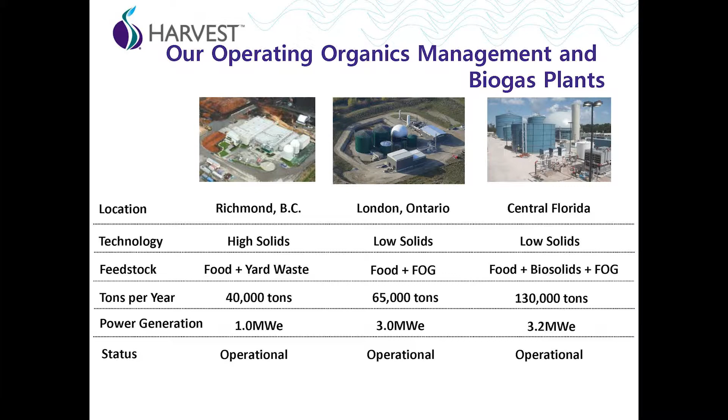And the facility in Central Florida, we're co-located with Reedy Creek Improvement District, and that is basically the municipality for Walt Disney World. They're in charge of all the infrastructure, water, sewer, roads, irrigation, energy for Walt Disney. So it's a unique municipality, and it's a unique partnership we have with this entity. So at our facility, we bring in food, biosolids from the Reedy Creek wastewater treatment plant, and fats, oils, and greases from area grease traps.

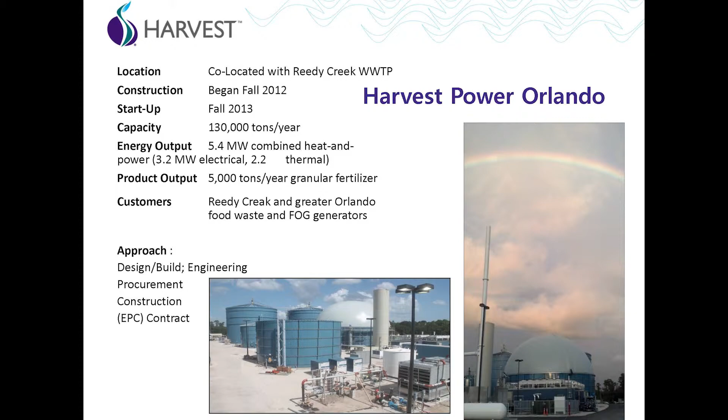And we have a process called anaerobic digestion that breaks down the organics, and the result of that is a biogas that's very rich in methane that we use in engines to produce electricity. And as a byproduct of the organics breaking down, we have a fertilizer product, which is used locally. So our facility is relatively new. Construction began in fall 2012, and startup and commissioning in the facility was a year later in 2013. So we've been up and running for approximately a year and a half.

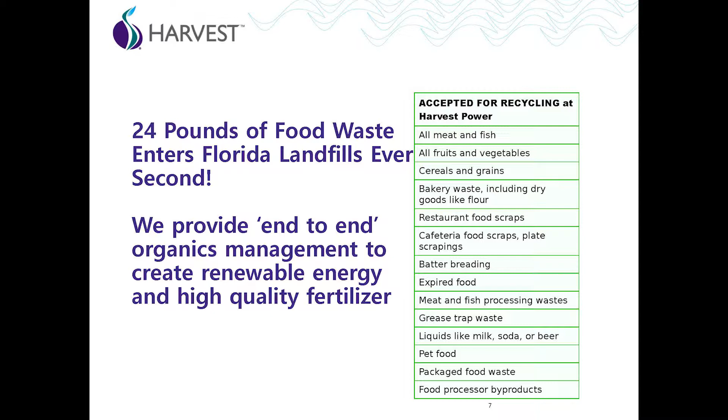So just some statistics. Every second, there's approximately 24 pounds of food waste that enters area landfills. So we're looking to bring material, organics, divert from landfills and bring to our facility. And we accept meat, fish, cereals, food scraps from the back of the kitchen, expired foods, damaged foods, pet food, liquid, oil and grease material. There's a lot we can take in and very few things we can't process.

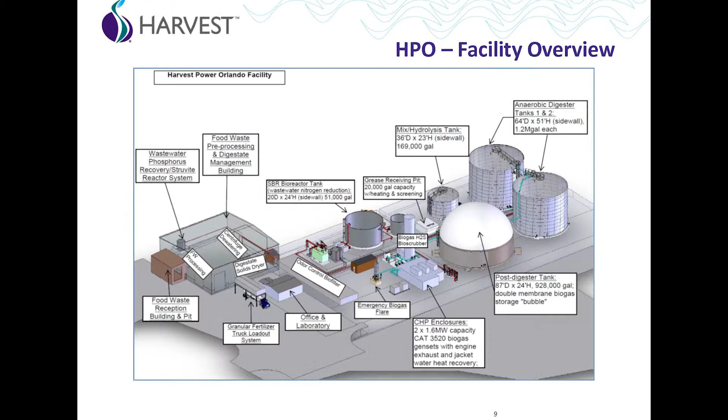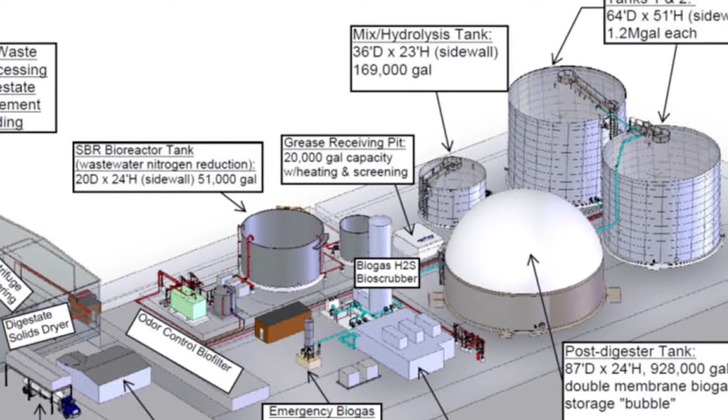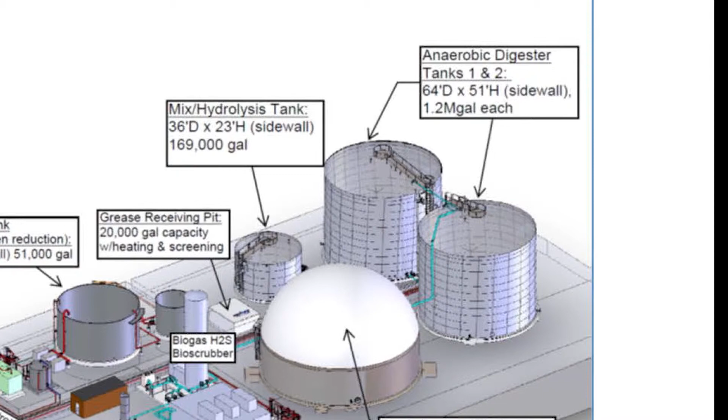So here's a schematic overview of the facility. So this area here is where we bring in food waste, and we have a food waste processing system in this building which removes papers, plastics, metals from the organics waste stream, and that material is then pumped as a slurry over to this tank here, which is a mixed tank, and this tank mixes the food waste organics, as well as liquid grease waste from grease traps, and biosolids, sludge from the wastewater treatment plant, which sits up here. From the mixed tank, the material moves to these 2 tanks, anaerobic digesters, which are heated and mixed, and the organic material breaks down in these tanks.

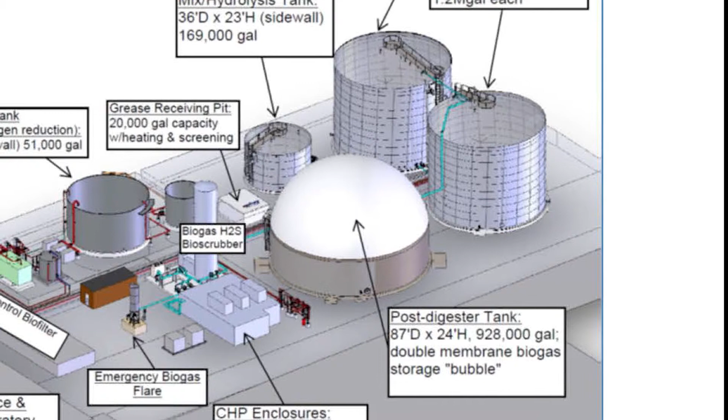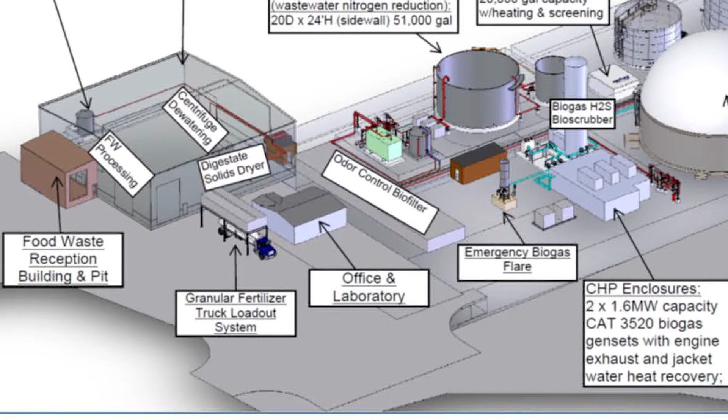And as the material breaks down, it releases a gas we call biogas, which is stored here. And from this bubble, the biogas is used in two engines, 1.6 megawatt Caterpillar engines to produce renewable electricity. So we use a portion of the electricity, about 20% on site, to power all of our equipment, and the rest goes back to the utility and goes on their grid system.

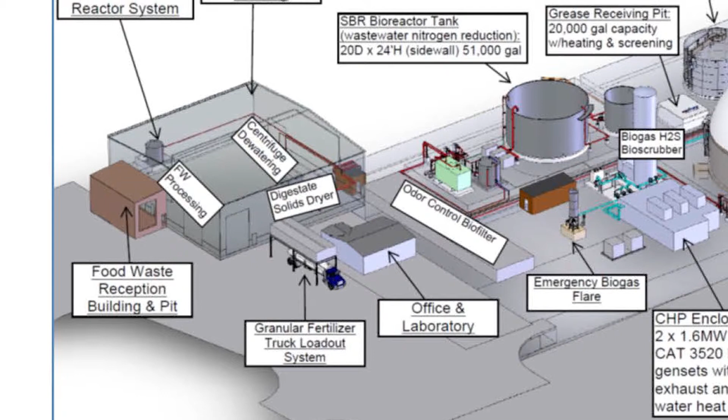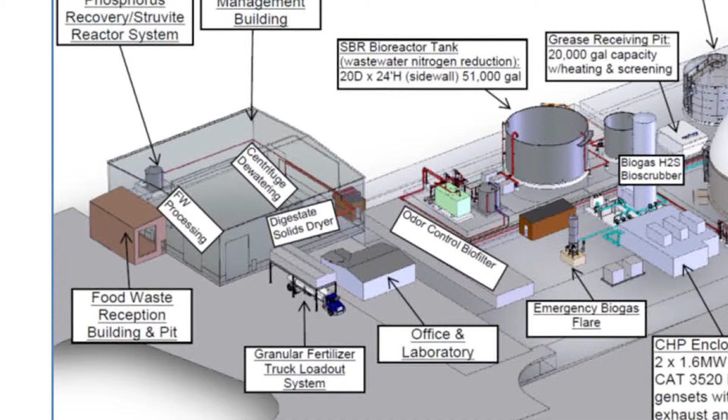So after the material breaks down in these tanks, it's stored here, and then it's pumped back over to this building where the water is taken out of the material, and that produces a cake-like material that is then dried. So the cake material, the digested organics are dried to create a fertilizer, which is stored in a load-out bin here, and then trucks come back in, and the fertilizer dumps into the bed of the truck, and it's hauled away to local agriculture, citrus and sod farms mostly.

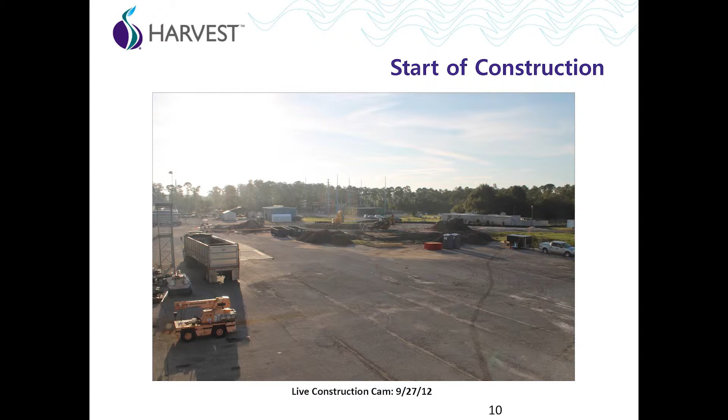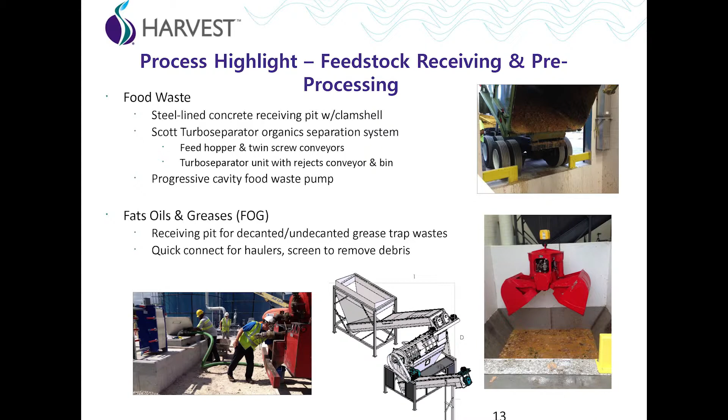So here's a photo of the facility at the start of construction, and then a little over a year later, the end of construction. So just a little bit about our equipment. The food waste comes in on trucks, you can see here, and the food waste is dumped into a pit, and we have a clamshell crane type system to move the food waste into our food processing system, and this removes the inorganics, the papers, the plastics, the debris from the food waste, and water is added to this machine to create a food waste slurry, which is then pumped to the mixed tank and the digester.

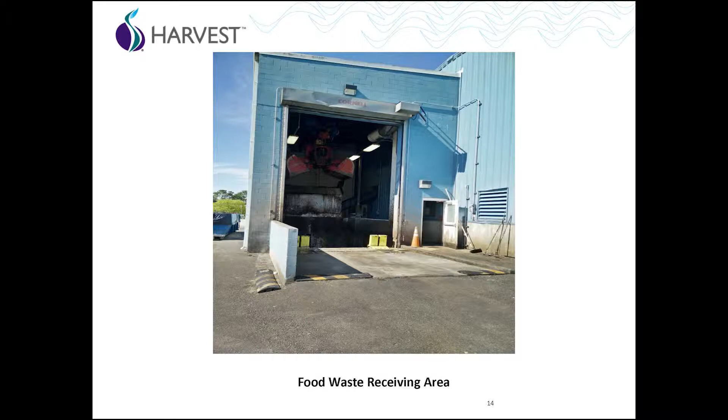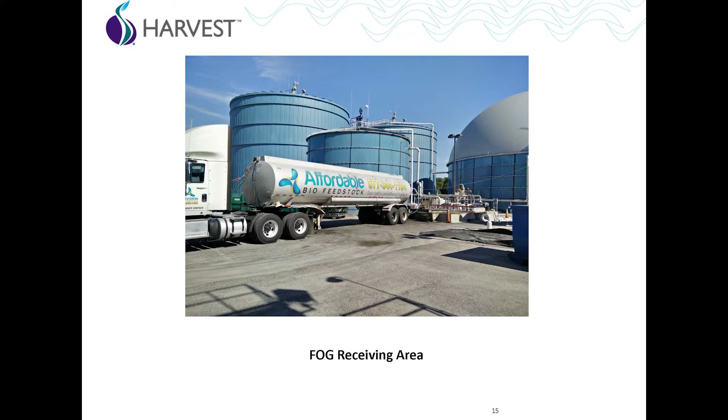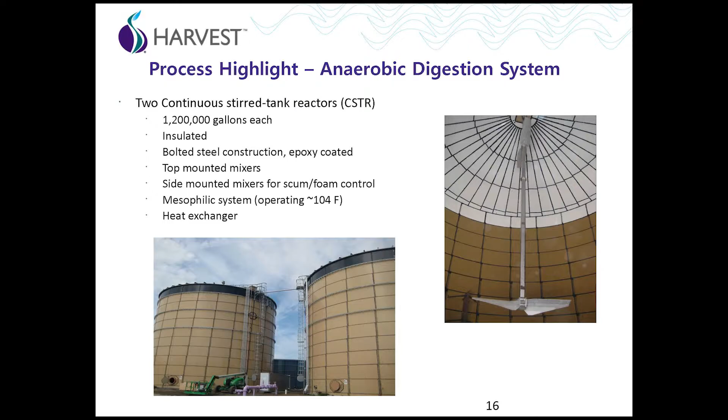So here's just a photo of our grease receiving station, which is basically a 20,000 gallon concrete pit that the truck haulers back up and, using a hose, unload the liquid grease into. So just a photo of our food waste receiving area. Our FOG receiving area with a tanker truck of material. This is a look at the anaerobic digestion tanks. Each tank is 1.2 million gallon, and they're bolted steel construction. They're heated and mixed. Here's the mixer that hangs down into the tank, and this is where the organics are broken down to produce the biogas.

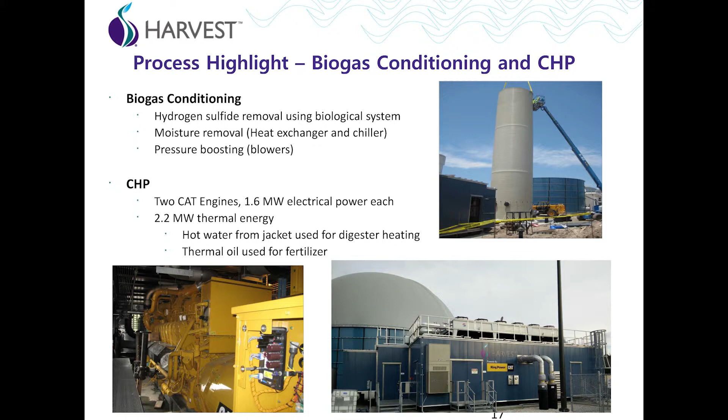So the biogas is treated. Before you can burn it in engines, you have to remove moisture and hydrogen sulfide. So this is the tower for scrubbing out hydrogen sulfide. And after the gas is cleaned up, it's used in two Caterpillar engines. And the engines are housed in containers just to protect them from the elements and for sound attenuation. Here's a picture inside the container where you can see the engine itself.

So as I was saying, on the back end, the digested material is dewatered in a centrifuge, and from there the material is sent to a dryer where it's dried to about 92% solids. So it's a very dry, dusty product, and stored in load-out bins and taken off-site for agriculture.

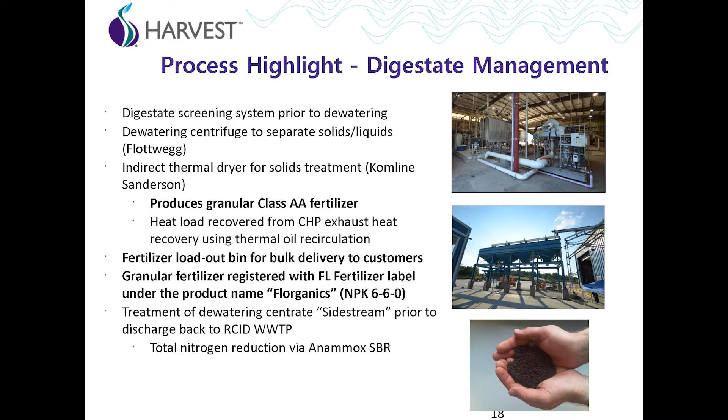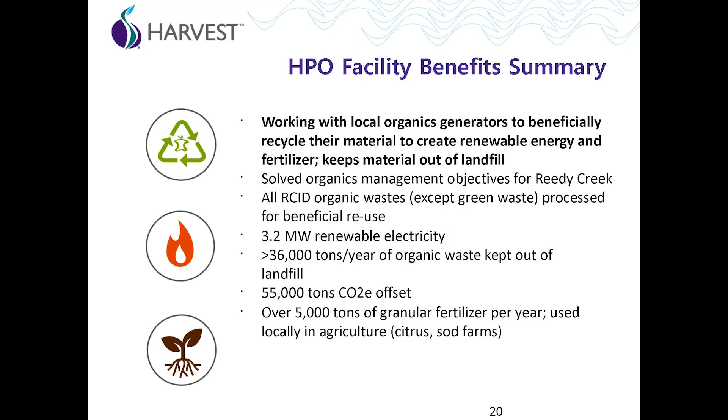So just some highlights of the facility are we work with Reedy Creek and also outside food waste generators to bring in material in order to keep it out of the landfill. And in doing so, we generate 3.2 megawatts of renewable energy, and the CO2 offset from this process is about 55,000 tons per year. And another benefit is producing a local high quality fertilizer product.